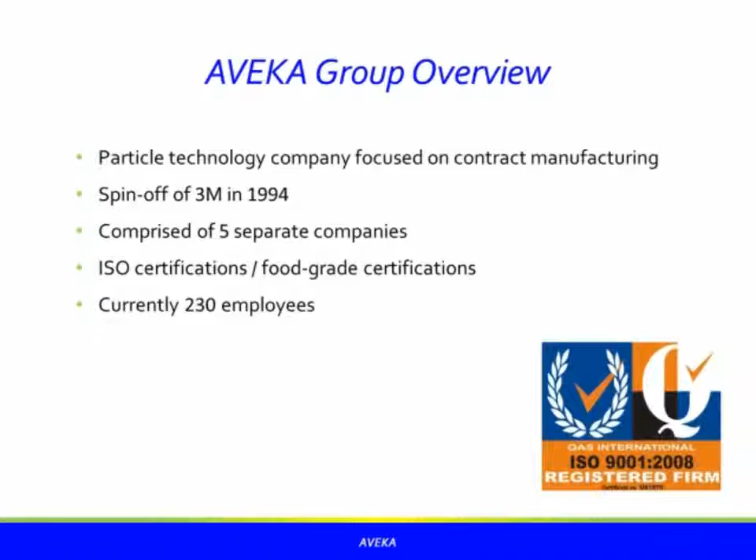The vision we have, as shown on this next slide, is to be the recognized leader in innovative manufacturing solutions, specifically in particle technology. Innovative manufacturing solutions is one of the important things we try to distinguish ourselves with, because when somebody comes to us with an idea, whether it's in grinding or spray drying or whatever, many times the easy answer isn't the right answer. So we look for that way of being innovative in many ways, and hopefully as I go through the talk I'll show you how we actually do this.

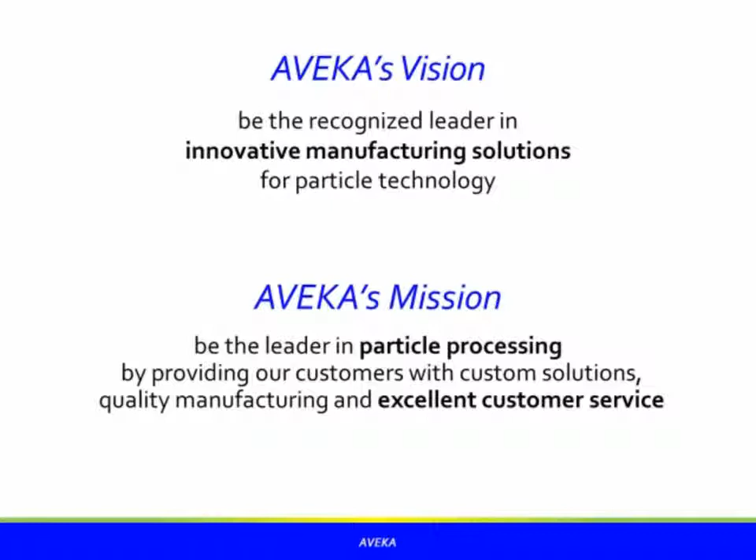Our mission is to be the leader in particle processing, primarily by providing quality manufacturing and excellent customer service. Our customers tell us whether we're doing the job or not, and I think for the most part they've liked what we've done.

What I'm going to do in this talk is talk about what we do, but use a number of case studies on how we approach things to give you an idea of what we're doing. One of the things we've done is a lot of specialty materials processing. People come to us and ask us to do things we don't necessarily know. This is about 2 years ago.

We had a customer come to us and ask if we would put up a facility to receive a liquid, take that liquid, filter press it to concentrate it, take that material, fluid bed dry it, and finally vacuum package it. The first time they asked this question, we told them no, because we don't do filter press concentration—that was not one of the things we did. After 3 or 4 questions on this and insisting they'd really like to work with us, we finally said, well, let us take a look at the process, see what it is, and we agreed we could do it. But the problem was we did not have filter presses in our plant, nor did we even have a place to put this equipment.

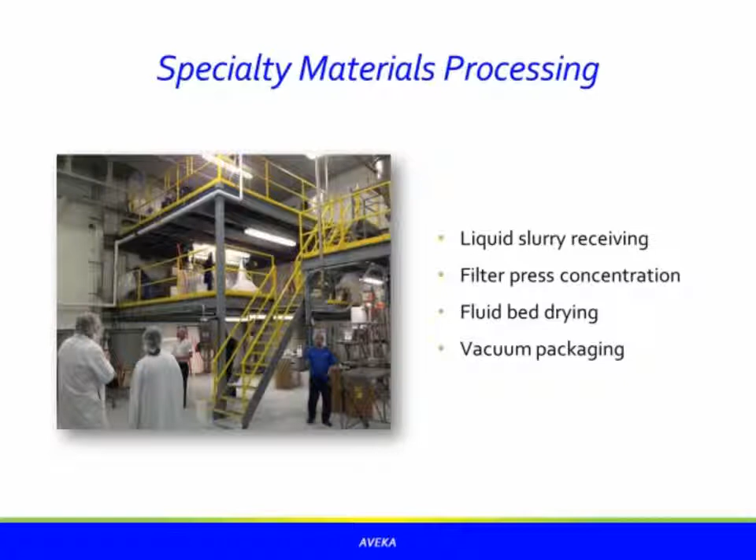Think about this. When I was at 3M, if somebody had approached me and asked me to put up a building, IQ, OQ, PQ the equipment, purchase the equipment, and get it up and running, I would have told them for the size of this facility that it would have taken somewhere between 18 months and 2 years to make this happen.

So when we told our customer we were going to do this in 18 weeks, there was dead silence on the phone, and the response was, well, let's see what happens. We actually didn't make the 18 weeks. We were able to build this and IQ, OQ, PQ the equipment in 18 weeks and 1 day.

The day we called our customer and said we're ready, why don't you send us equipment or raw materials so we can start processing, once again there was dead silence on the phone, and the person said, Willie, if you could see me right now, I'm absolutely red-faced. There's no way we believed you could get this done in 18 weeks, but we're going to give you a chance to do it, and the fact that you did it, we don't have the raw materials ready for you.

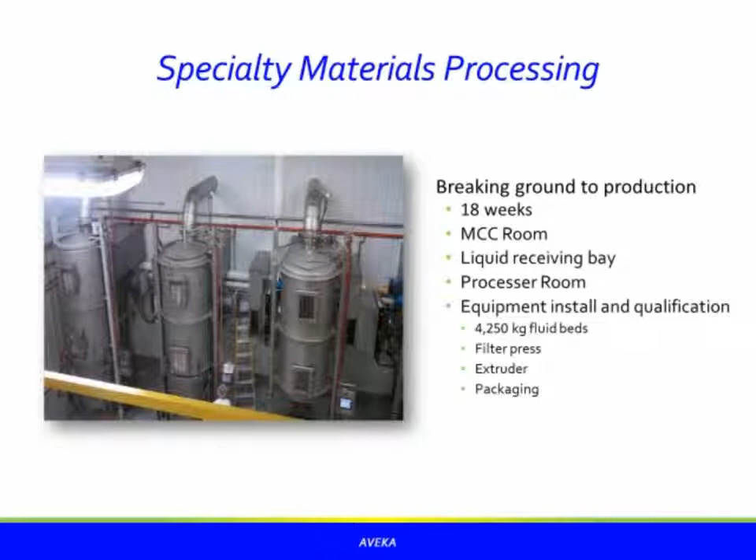Capabilities range from, can we do a pound of material as a test run, or can we do truckload quantities every 8 hours? We actually have equipment that can do that. Part of the reason we have these different pieces of equipment is we're never sure what our customer is going to come in and ask, and how are you able to be prepared for something that should go in a different piece of equipment? The way we've addressed this is we try to have quite a bit of different pieces of equipment, and this is showing you some of what we have.

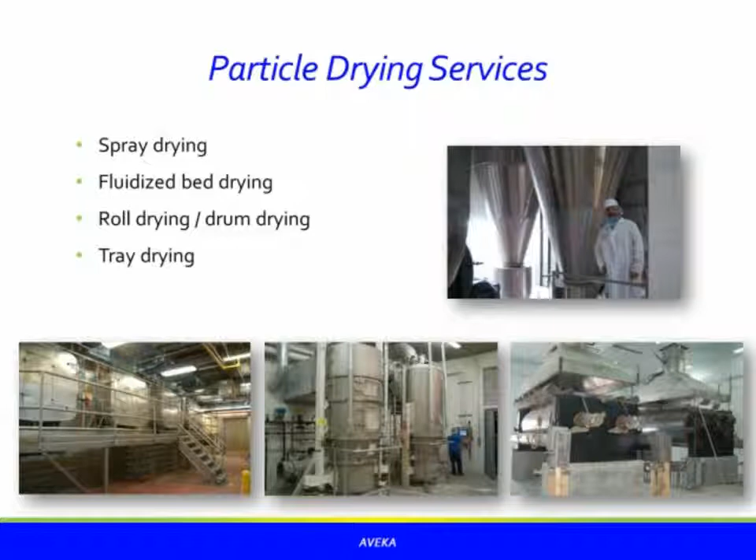The problem we had is we had multiple customers come to us and ask for us to provide microencapsulated omega-3 oils. Omega-3 oils, we should all take them.

It's great for heart health. It's great for your digestive system. But the problem with omega-3 oils, I think what makes them useful to us is they are very sensitive to oxidation. In fact, in a bad case, if you take a fish oil pill, it smells really bad—that's the rancidity, the oxidation that's occurring. In the really bad case, omega-3 oils can actually spontaneously combust.

So we started spray drying some of these materials, well aware of some of the sensitivity to oxygen. And after 3 fires in our dryers—small fires, not necessarily disastrous, but fires in our dryer—we decided that we weren't going to spray dry omega-3s anymore.

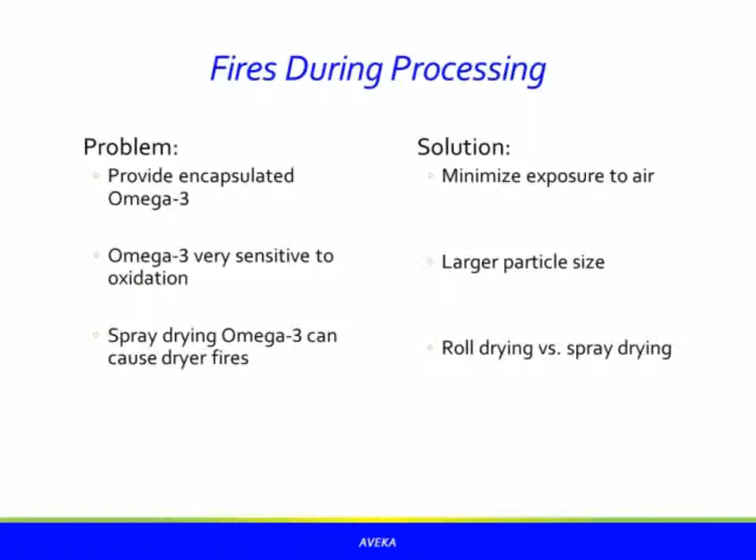AVEKA Inc. was where I'm sitting today. It's in Woodbury, Minnesota—our corporate headquarters, and it's where we do our R&D. We have 3 plants in Iowa: AVEKA Manufacturing, Cresco Foods, and AVEKA Nutra-Processing. AVEKA Manufacturing is probably closer to an industrial type of environment, whereas Cresco Foods and AVEKA Nutra-Processing are food plants.

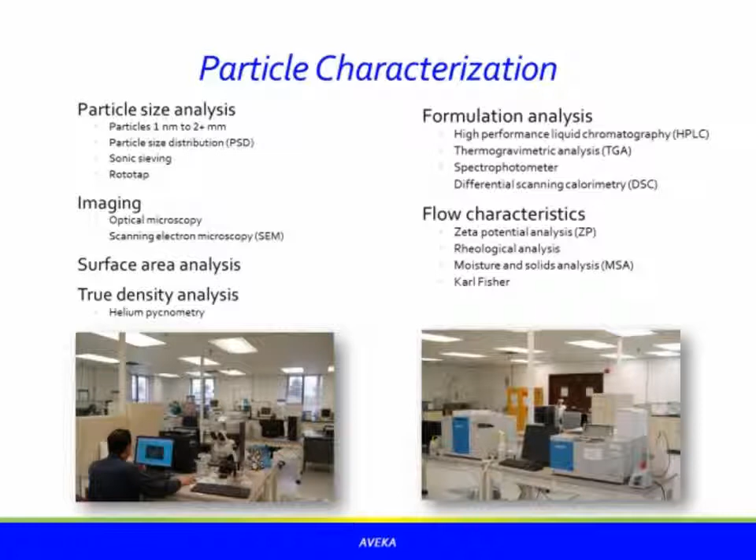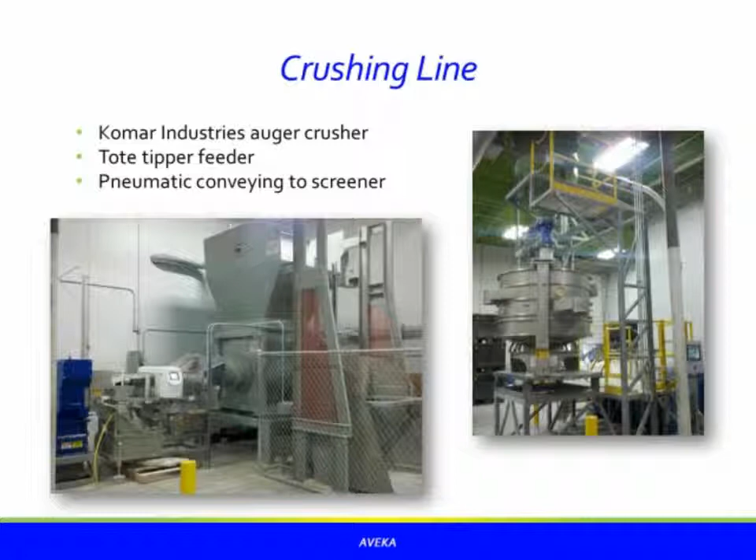Eventually this material is pneumatically conveyed to this hopper, goes through a screener, and at that point we have material ready to be processed. The pre-crushing is just the start—what we're really doing is ball milling the material down to a very specific size.

In 2003, when we started this project, we had a specification of a D50 of 15 to 35 microns. All these ceramic parts are the same material, but they come from around the world in different sizes, so achieving a consistent D50 with this wide variety of parts seemed like it would be very difficult. Well, we were actually able to make it.

As time went on, our customer said, 'It's great that you've been hitting this 15 to 35 micron optimum process—can you do better? Can it be 18 to 24?' By 2013, the spec had changed to 16 to 19 microns.

Now remember, this is a D50, not the full span of the particle distribution, but to have that consistent D50 show up again and again and again was mind-boggling.

In 2012, we'd been keeping good records of particle sizes across thousands of ball mill runs, and we found that even though we were within the D50 spec of 18 to 24 microns, there was a seasonal cyclical behavior in the particle size—it was going up and down. This told both our customer and us that there was perhaps an opportunity to tighten this down a bit.

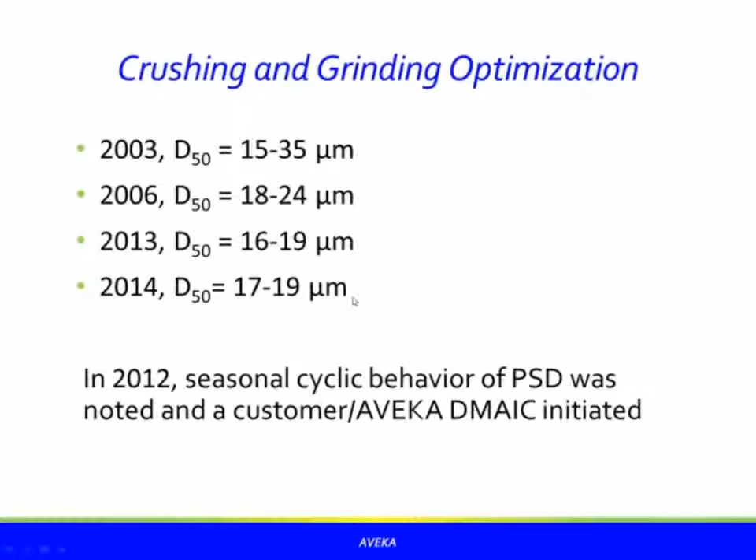The DMAIC study took about six months, and we found that we could control the particle size and tighten our range from the initial 15 to 35 microns down to 16 to 19 microns by adding a proprietary grinding aid.

This is a ball milling process, and we added a small amount of grinding aid to the system. The cycling went away, the particle size distribution became tighter, and surprisingly the grinding rate actually increased—we decreased our ball milling time by about 30%.

Using particle characterization, good statistics, and good quality measurements, we were able to optimize the process, make a better material, shorten the process time, and get this thing in spec.

An interesting thing happened on the way to the forum - while this grinding aid helped, it was not completely sufficient for total particle size control. One of the things we found, and we're very excited about this because the results we're seeing are showing better control. We're now measuring everything, and what we found was the ball mill temperature was a secondary effect that was almost as critical as the proprietary addition.

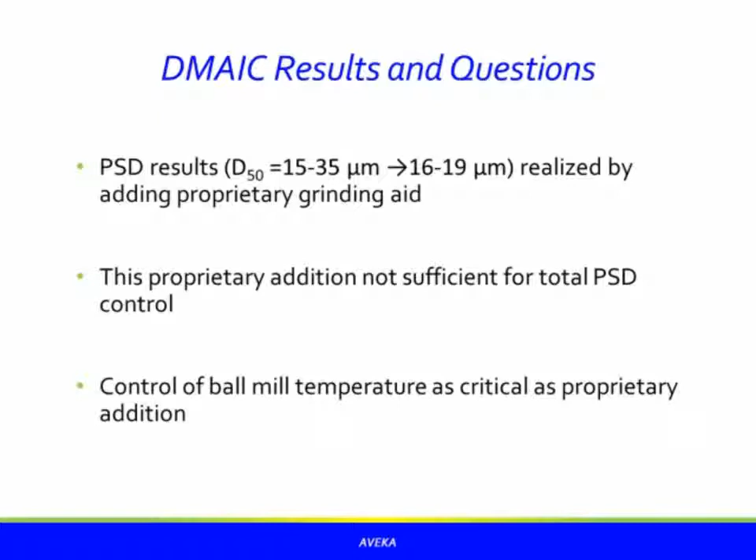We had a secondary effect, ball mill temperature, that was important, and we're now looking at a tertiary effect. So we're continually optimizing this process, giving better value to our customer, better consistency, better value to us, by using a lot of the good quality and particle characterization methods that we have available.

Where this leads me is - I just talked about three cases. One was about fast implementation, one was about how do we assess a new particle processing, and the third is how can we get better quality. We've identified these things as key factors in our company.

So we've focused on quality. We have 11 quality personnel, and we're either ISO certified or GFSI certified. When I started my business, I looked at quality as perhaps a problem. I look at it now as the solution.

We've always had a good research area. We have 7 laboratories and pilot plants, and 15 scientists and technicians, so when somebody asks us something different or out of the norm, we're actually able to address this. And finally, the ability to come up with a rapid solution, whether it's building a new process line or an innovative solution - we have on-staff engineers in all of our plants, and their objective is to modify, make it better, make it faster, so we can be a better supplier for our customers.

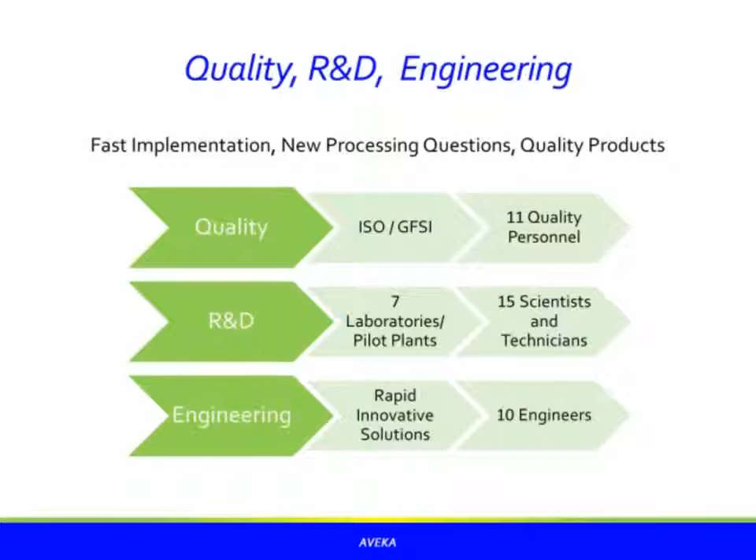I think this slide really speaks to some of the things that we hold near and dear and how we try to operate to the best of our ability.

I'm going to give a little bit of an overview of dry grinding. We have different methods for dry grinding. The largest particle we get out is at the top with pre-crushing, and the smallest particle we might get out with our jet milling process - these are just typical types of processing. Once again, just like with our drying process, we have different processes because different materials grind differently, or different particle sizes are needed, so we need to dry and grind them to the appropriate size.

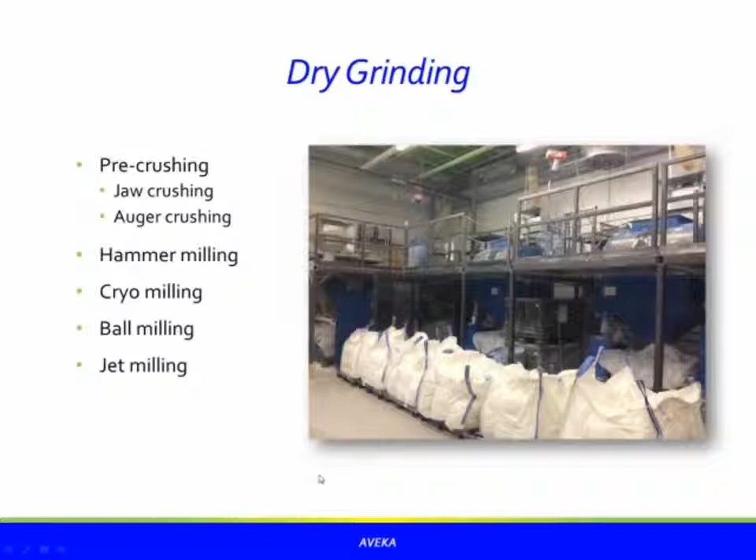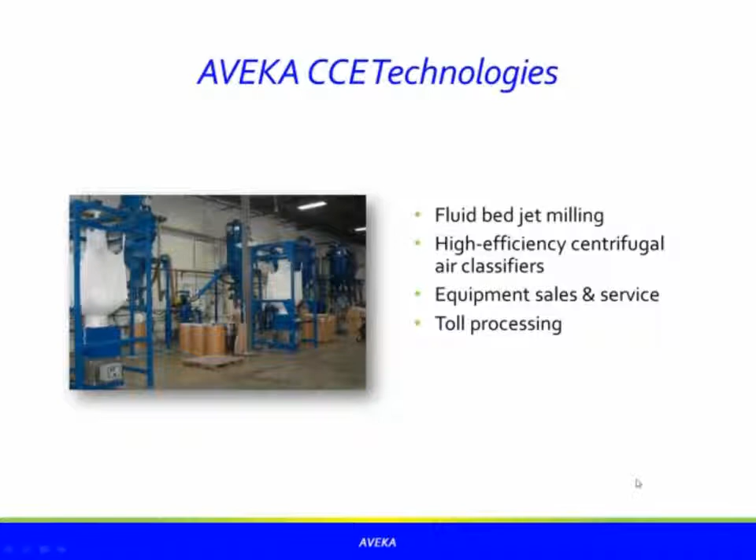So let's see if I can move - I'd like to talk a little bit about jet milling and classification. The picture I'm showing here is of the jet mills that we actually build for sale and for our own use. I'd like to give you a short case study about a project we're currently working on, where we're actually jet milling glass.

The challenge is we're receiving crushed glass, about 1/8 of an inch in diameter, and we need to produce a high yield. The problem is when we're jet milling this sort of material, the yields are low - we're only getting 42%. What's happening is as the particles come out of the jet mill, we have a lot of fines, and the fines are causing a lower yield, and worse, they're actually sticking to the coarse particles. So we think we might be classifying and grinding properly, but we're not.

Now what we've done in a situation like this - this is your typical 'I've got to work my way through this' - is we balance the energy input. In other words, we're balancing the amount of air we're putting into the jet mill for the jets themselves, more air or less air, and we're changing the cut point, cutting a little bit higher or a little bit lower.

On our first run through the system, we were actually able to increase the yield up to 54%. Now, that still means I'm throwing 46% of the material away, but this is the stepwise process you go through with something like this, balancing off all these parameters, and the idea is to just keep pushing that up.

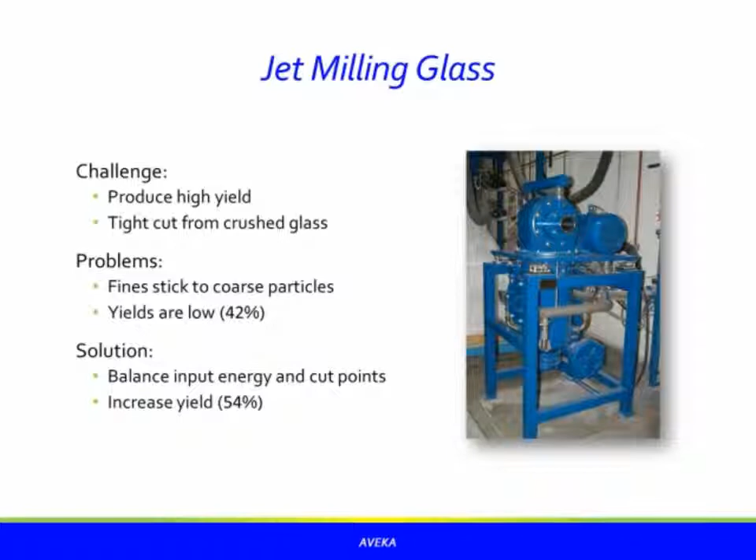So as I've given this talk, I've basically talked about the process technologies that we do: spray drying, grinding, a little bit about roll drying, a little bit about fluid bed drying. The processes at the bottom are what we typically call our value-added processes: particle coating, microencapsulation, bead making, microfiltration, purification. I'm going to end my talk with an example in microencapsulation and particle coating, to give you one last flavor of some of the things that we do.

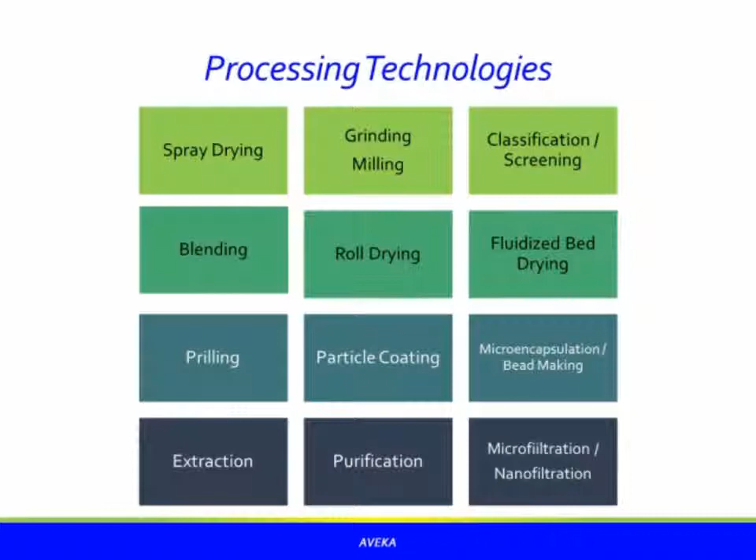In microencapsulation, we do a lot of microencapsulation and bead making. There are different types of particles and microcapsules you can make, ranging from a core shell type of structure—this is a spray-dried core shell microencapsulation of a fragrance—to a matrix type of particle, like this alginate bead that we make by precipitation, to a coating or plating process, which is a particle made by a process we call MAIC, magnetically assisted impact coating.

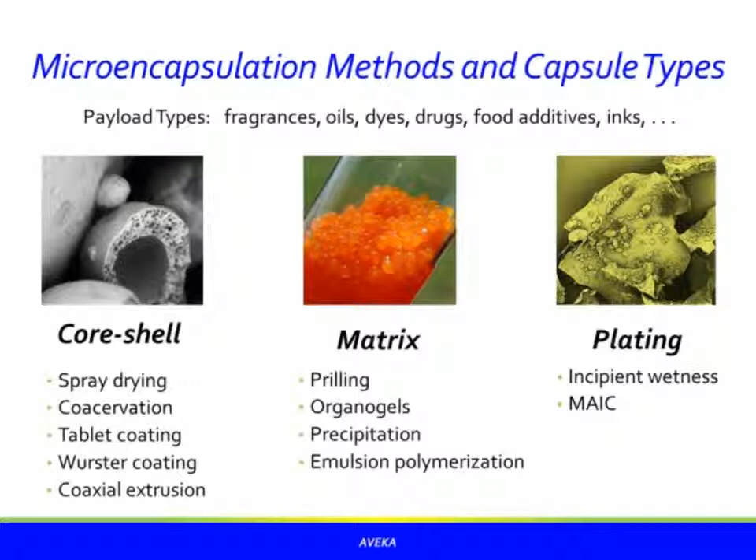Magnetically assisted impact coating is a process where you take small particles, indicated by the red, and large particles, indicated by the green, and put them into an oscillating magnetic field as shown here. The magnets move around in this oscillating field, and they literally pound the small particles onto the big particles.

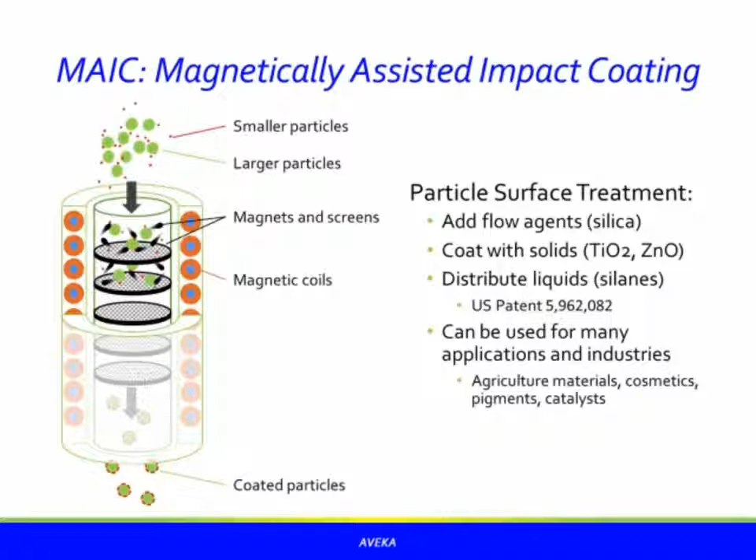If we consider this in an even broader case, we've done this where the small particles are actually a liquid. So now they're very small, obviously, and we can use this process as a very good method of coating liquids on top of small particles. Let me show you what I'm talking about in this next slide.

So here we have a schematic. The black particles are magnets that are moving around. In the coil, we have a number of screens, sized to allow the big particles—the blue and the red particles, or the small particles, excuse me—to go through the screens but keep the magnets on the surface.

As the particles go through the system, the magnets literally impinge the small particles onto the big particles, and you can see coming out the bottom a coated particle assembly. What's interesting is this is a process that allows you to put any small particle onto any other large particle.

As an example, we've coated silica onto polymers, and by the same token, we've coated the same polymer, if we have the right size range, onto a glass particle. We've actually used this process to put organosilanes on particles, so we have an extremely uniform process, but we're not using solvents. This is a continuous process done with no temperature rise.

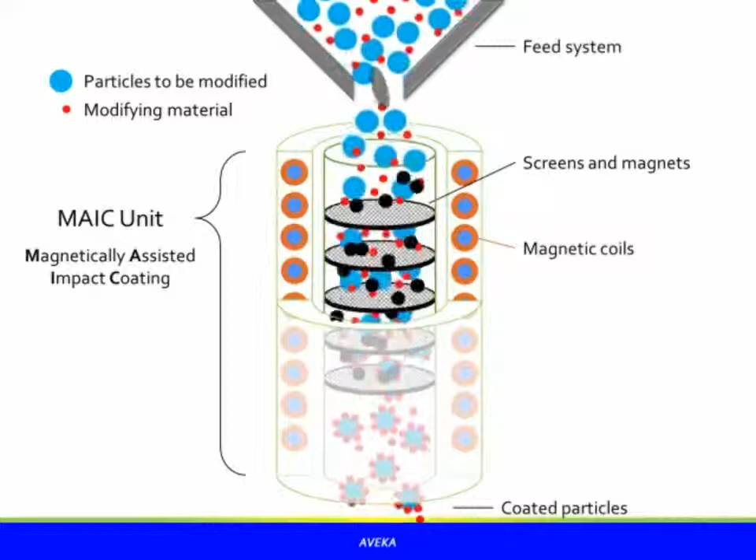The process we have has the ability to treat particles as small as a tenth of a micron up to 5 millimeters, and allows you to uniformly coat either liquids or powders onto the materials.

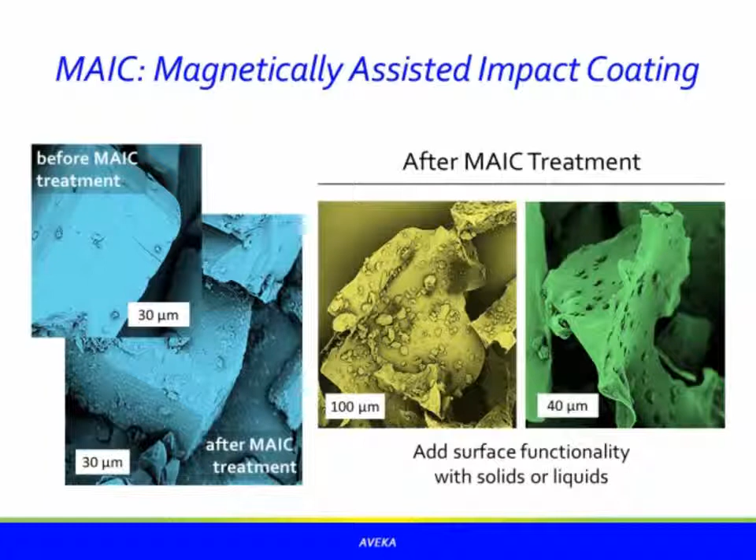Here are some pictures that actually show this: a salt particle before treatment, and a salt particle after we've decorated the surface and got a good coating on it. Obviously, if I showed you a particle where we put a small amount of a reactive liquid, like an organosilane, it's hard to see that it's gone on there. But by checking it with chemical methods, we can show that we have a very, very uniform process. The process is continuous, and it lends itself to both small and large volumes.

So I'm going to end here with: why would anybody come to a company like AVEKA? When I started the company, we thought that we were going to get business because we have this wide range of process capabilities and we're innovative.

Well, that works up to a certain extent, but at the end of the day, the customers are most interested in whether you produce a quality product, have good customer service, and are committed to health, safety, and environmental standards. We added this as part of our business, and what we found out is customers like that, but mostly what they like is that we're very flexible in how we approach any problem, whether it's building a new facility or deciding which grinding or drying method to use.

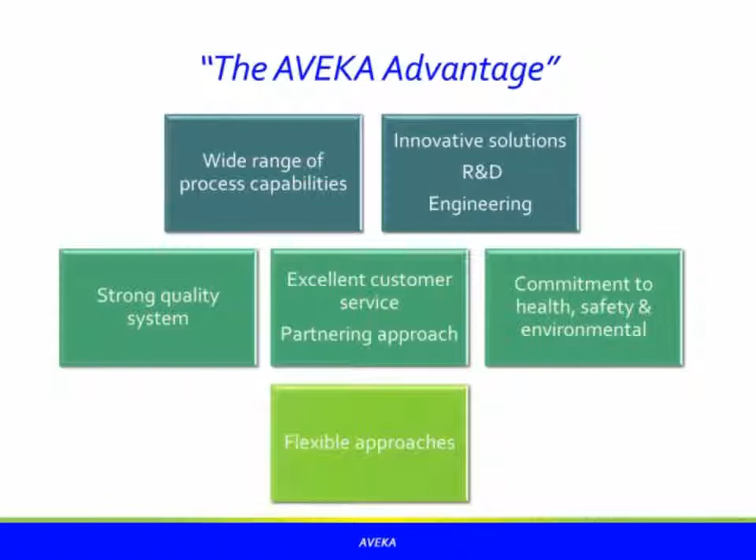At the end of the day, we like to think that we provide innovative manufacturing solutions. We do R&D lab scale testing through pilot to full-scale manufacturing, but what we really like to do is look for value-added product partnerships.

And Jeff, I think I'm done, and we have about 10 minutes left, I believe. Are you there, Jeff? I am here, I muted myself for the same reason I muted everybody else, to cut down on background noise. Yeah, well, great, that was very interesting, and certainly if you ever get a chance to see Willie's facility, you should take advantage of it.

We have a few questions. The first is, have you ever tried the MAIC in food ingredients? We have not, and it actually should work for food ingredients. We've just never done it, no one has asked us to propose a project. It should work just fine. The magnets themselves are the only thing I'd be concerned about from a food standpoint, but we actually coat those with a food-grade polymer in any case. So I think it would work very nicely in a food process.

Does that mean I can look forward to some very interesting Christmas cookies this year? I think so.

Okay, second question is, how is IP managed? I come from 3M, and 3M is, as you all might know, a very good company for intellectual property. When I started my company, if I used the 3M model where I keep all the IP, I very quickly realized that it was going to be a bad business model. So when we do small projects with customers, we'll actually own the IP. When we do larger projects with customers, we have an arrangement where we prefer that our customers own the IP, and we just ask for the right to do the contract manufacturing.